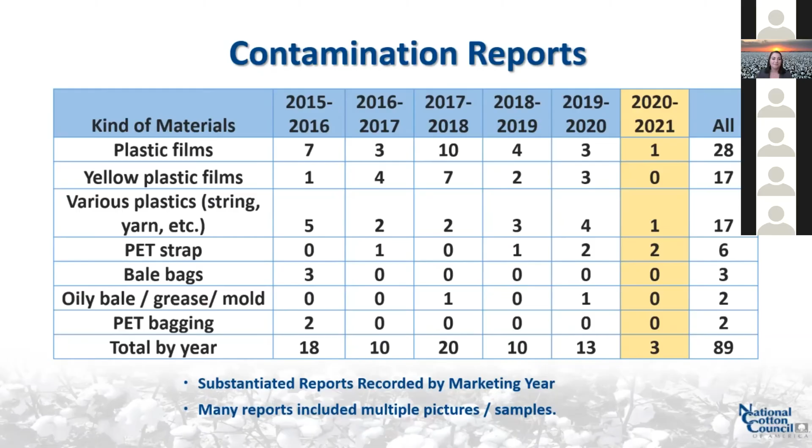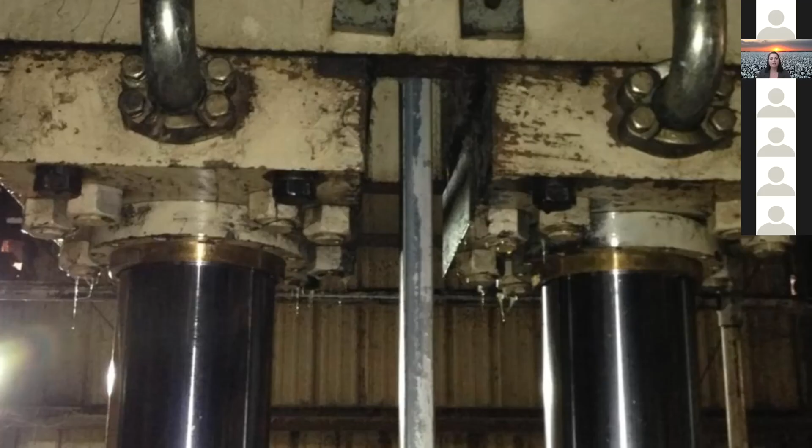Another thing we don't see in reporting, or haven't had cases of, but is still an easy thing to check on: making sure all your machinery is as clean as possible, that we're not getting any oil or grease inside of the bale press that could potentially get onto the bale. Just another easy thing to check around the gin to help combat this contamination issue.

Going into the round module wrap, we have been in the process of creating a new performance standard. I'll just give a very short background on what's going on, because John Wanjura will probably touch more on this since it's kind of his baby. TAMA produces two different types of wrap: their premium wrap, which is yellow or pink, and their value wrap, which is blue.

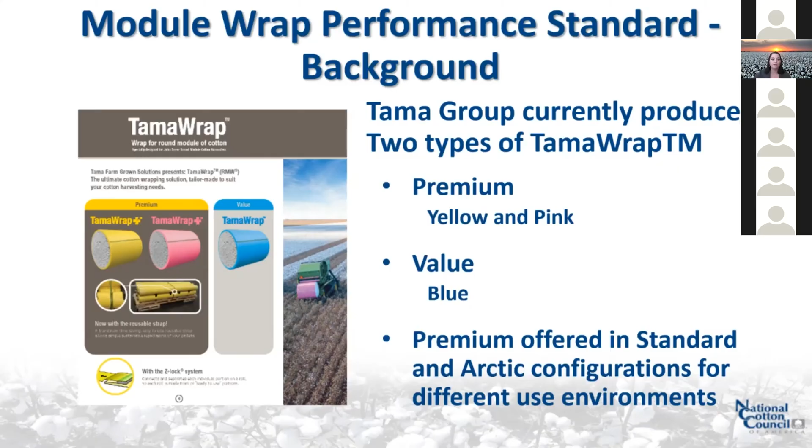This blue value TAMA wrap was developed as a lower cost alternative to the pink and yellow premium wraps. It can be more susceptible to damage due to less robust construction than the premium wraps, so we have to handle it more carefully due to the adhesive layer not being as robust.

On the premium, you have a full round layer of adhesive. On the blue, it's only a smaller strip of adhesive. Another issue is that in their specs, they claim these can be up to 100-inch diameter as a maximum for the blue wrap.

Whereas 92 inches is generally considered the maximum for the premium wraps. And as y'all may know, even with the yellow and pink at 92 inches maximum, you can still run into issues whenever these round modules are loaded onto module trucks, scrubbing the sidewalls and causing damage and pinch points, resulting in the wrap fraying, pulling, or ripping.

So that's something we have a cause for concern on. With a larger diameter, we're looking at even more chance of that happening. So be mindful of how large you create these modules, to make sure that if you're using a traditional module truck, we're not scrubbing the sides and causing unnecessary damage. These also have a higher chance of squatting in the field just because they run a little larger and have a little less robust shape to them.

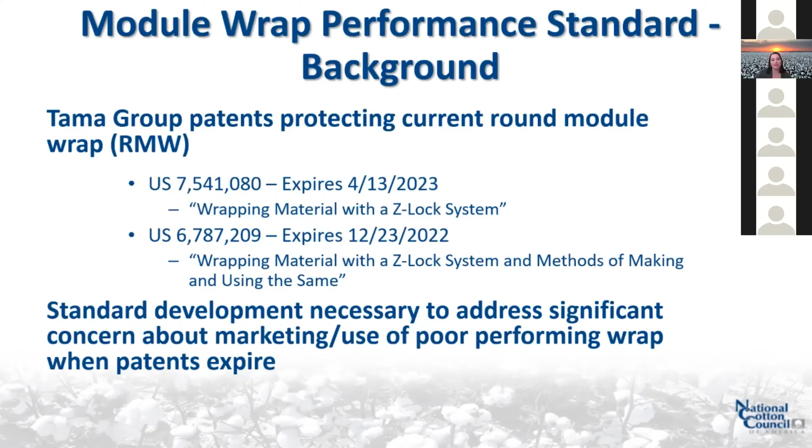We had a bit of an example of that this last few years with the PickSmart wrap, which obviously caused some major issues. TAMA is working with them legally because they came into the marketplace when they shouldn't have. But we saw some major issues with this wrap, and we want to make sure we address these quality concerns moving forward before those patents expire.

So a new standard is being developed to address the quality of round module wraps. We want to make sure that without a standard, wraps aren't more susceptible to damage. The standard will help the U.S. cotton industry promote the use of wrap material that's more robust and less likely to contaminate. We'll be looking at combined effects of multi-use layers, attributes such as adhesives that withstand both hot and cold environments, applied tension, length of module storage in various environments, and other factors such as color. I'll get into color a little bit later as well.

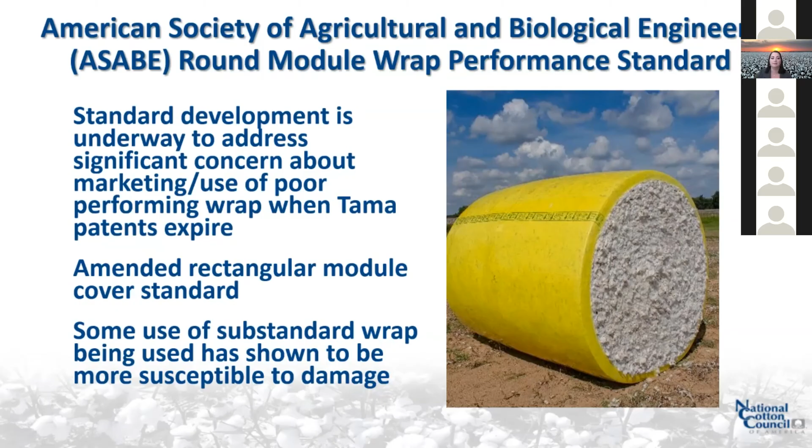John, who's coming next, will talk a little more about this, but I wanted to touch on it because it's so important. So why is prevention of plastic so important?

It comes down to loss of reputation and loss of market potential, as well as cost for the producer. And it's going to hit hard, especially this year. They just released the discount schedule, and plastic contamination for 71 or 72 is now in the negative 3,000s. So this is a big hit for anyone that gets a call with plastic.

We saw this coming from the beginning, but it's just reinforcing the fact that we need to pay very close attention to this and do everything we can to help prevent this plastic contamination before it becomes an issue.

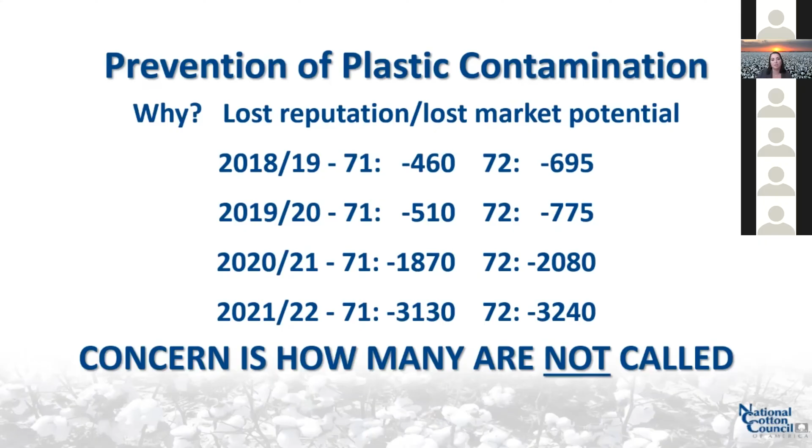But it just goes to show, if at all possible, walk your fields. Make sure that you get any debris or garbage or plastic out of that field before it's planted or before it's harvested, so that you can at least get that step ahead before it actually gets into the module and then has a chance to get into the gin and finally into the bale.

Some of our best management practices and continuing education - this is something we've added to over the last few years as we learn more. But the most important thing we found to prevent plastic contamination is making sure that these modules arrive to the gin undamaged. By doing that, it greatly reduces the chance of plastic contamination that gets into the bales.

So some management options we've seen gins and producers do is making a separate pile for your broken and damaged modules that come in and ginning those last. So you don't have any of that potential module wrap getting into the gin system and then running it back through with the good modules. Saving those for last keeps all the contamination potential at the end.

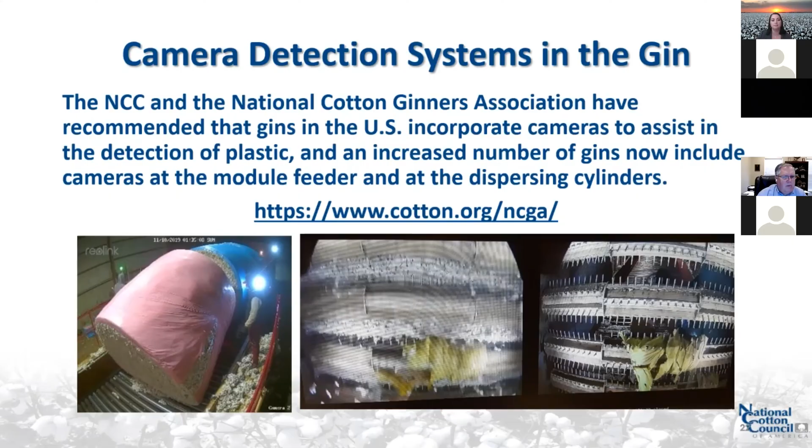Along with the cameras, we've also been updating and working on our education video, and this is available on both our website under the Contamination tab, as well as on our YouTube channel under the Contamination playlist. I hope all of y'all have seen this before - it's the 12 chaptered video, and it goes all the way from the field to opening these bales at the gin, and every step in between.

This would be a great resource for anyone doing staff workshops, grower seminars, or ginning seminars, in order to show their respective staff members each of these steps they may be responsible for. Each chapter ranges from about 3 to 5 minutes, so it's not very long, but it gives what to look out for, potential problems you may run into, as well as solutions to those issues and best management practices.

Just some updates on this. Since August 2020, when the video was last updated, we've had 739 views on the English version, and we do have a Spanish version available as well, which has had 18 views so far. If any gin, producer, or anyone wants a USB or flash drive copy, we can get those out to you - just reach out and we can get those sent.

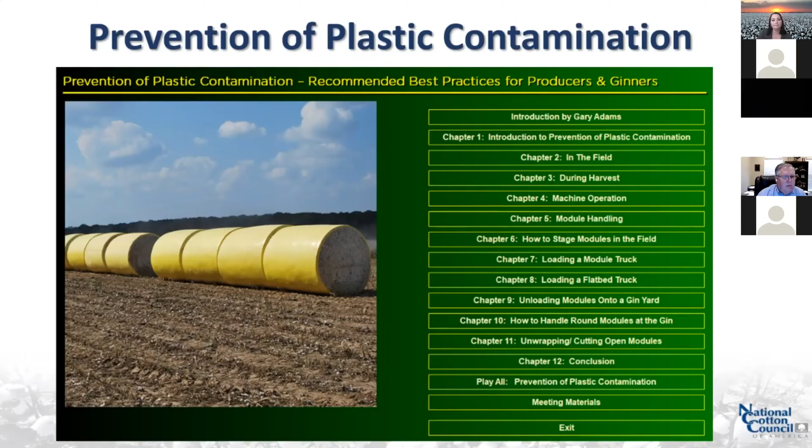That is a very important color. Our gin labs took a lot of time and research and development in order to distinguish this color as the best color for camera detection systems. This ranges from anything like the Viper to the detection systems you see in mills around the world. This blue color is completely separate off of the spectrum of cotton, so it really stands out very well.

The purpose and background of changing the woven polypropylene bag color was made for a good faith effort to mills overseas. We were getting complaints that these mills were cutting our woven polypropylene bag, and strands of the bagging material were actually getting into the cotton. We've not seen any evidence that that's true, and we've never really seen any evidence at all that our bale packaging is what is contaminating.

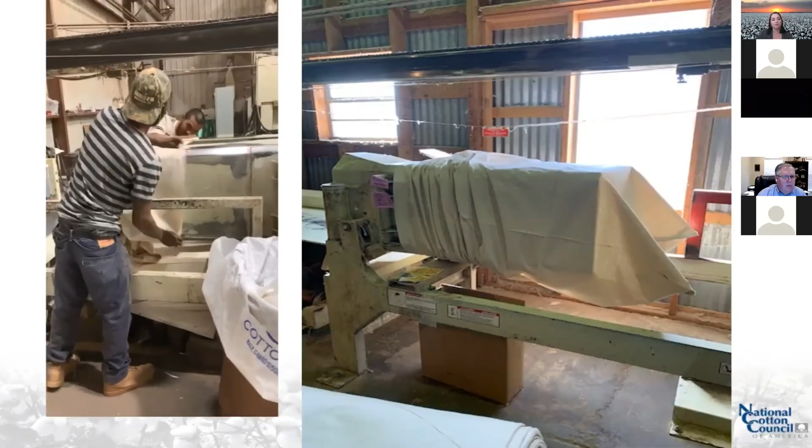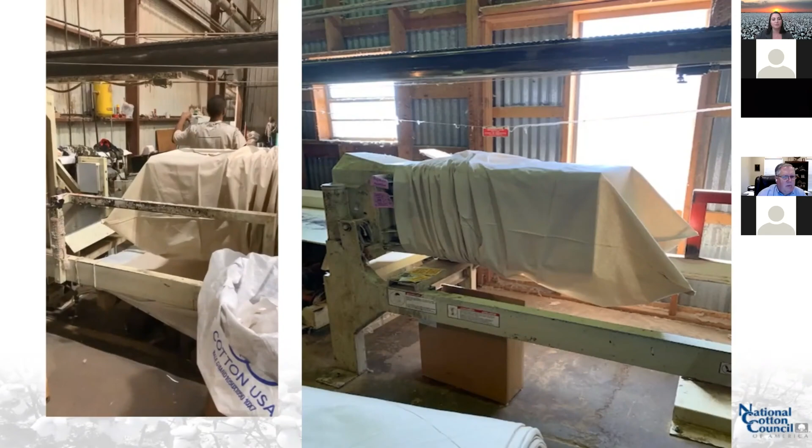I've got a couple of videos for you all. This is at the gin, and this gin previously used woven polypropylene bagging, but they actually preferred the cotton bag just because it was easier to get onto that manual chute than the woven polypropylene bag. It's just a little bit easier to handle. So that was a promising note.

It really just depends on how this test run goes. We hope to have some more reports back from international mills by the end of the fall on these bales, and again we're tracing them through the whole system. So we'll be in touch with more information as this progresses.

On a final note, we just want to make a point that it's critical that we reassure our customers and maintain our reputation. That really is the most important part in why we need to get rid of this plastic contamination, and why we spend so much time and effort on this issue.

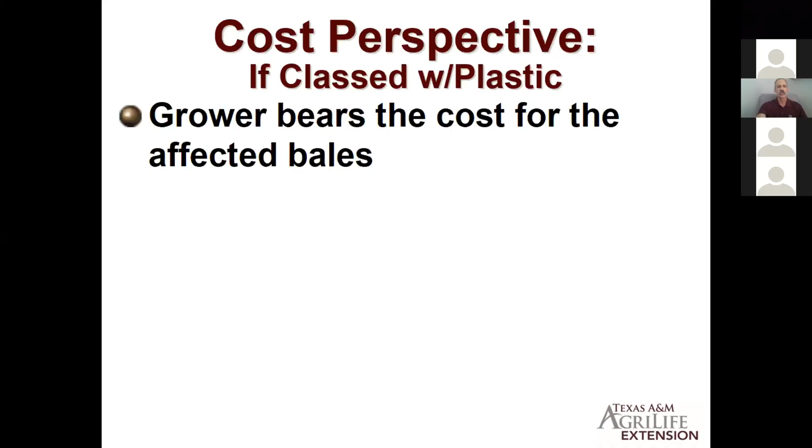So just a thought. We think about the cost to the growers. There are two ways to think about the cost impact of plastic contamination. Lauren mentioned this: if it shows up in the grading, then the grower bears the cost for those individual bales that are so graded. If you think about what happens to those bales in the market, you talk to a cotton merchant, they basically can't do much with those bales, so they really don't want them. That's what they'll tell you verbally, and that's what they'll tell you with their price.

If you had a forward contract to deliver bales to a merchant, there's probably some kind of buyer discretion clause that they don't have to take it if it has plastic, and many of them just won't. Or if they do buy it, they might buy it for 15 cents a pound or something like that. So when that gets translated by AMS in the spot quotes, AMS just reports that as a 40-cent discount associated with having plastic contamination. But it may be 100% — the merchant may just flat out won't take it. That's for actual market trading, buying at that price.

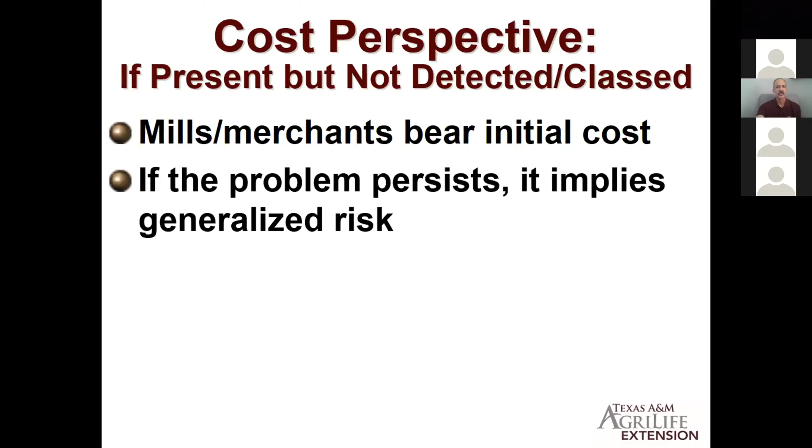Just think about it. What would a mill do if a certain region of the United States developed a reputation over a number of years of being a source of plastic contamination? Given a choice, they wouldn't buy bales from that region if they could help it. And if they did, the implication from common sense, economic theory, and past experience is that they'll bid lower for bales from those regions. They'll reduce their bids by the amount of their expected mitigation costs.

We have some evidence for this, some precedents, though not from plastic contamination specifically. There's very little data we can get our hands on as of yet, but we have experience with other forms of contamination that would have us worry about this sort of thing.

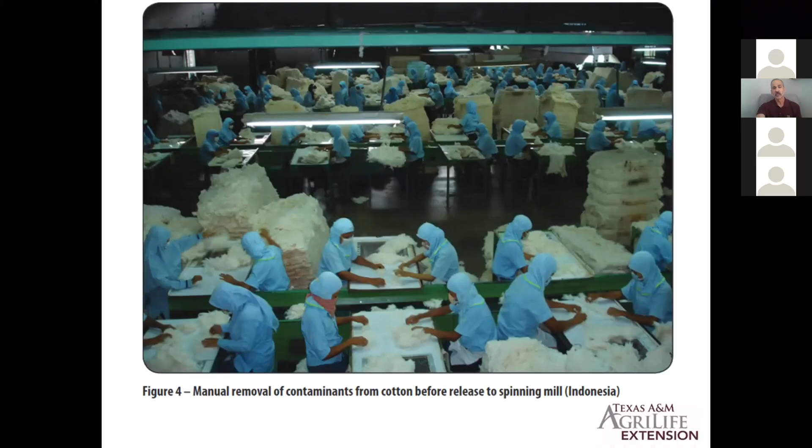This is a picture from Indonesia, 10 or 12 years ago. But this is the first thing a mill is going to do if they open up a bale and realize there's a whole bunch of contamination in it. They're going to have to go through all the bales from that particular purchase, from that particular source. This has been estimated to cost about 1 to 2 cents a pound. It just adds to the cost of that cotton.

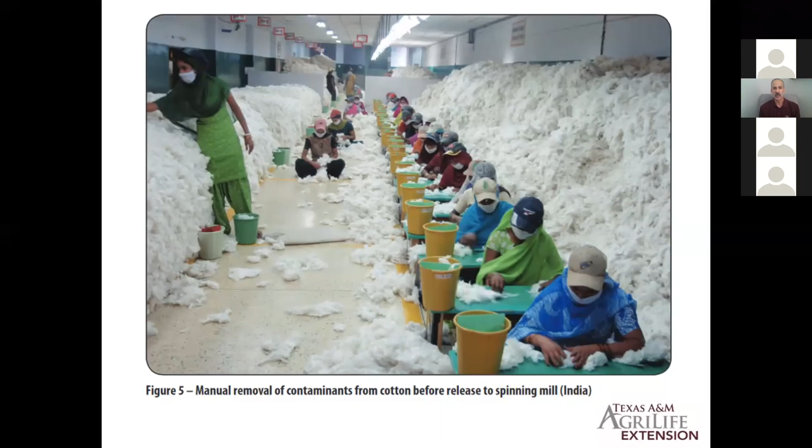Now, that may not seem like a lot to you, 1 to 2 cents a pound, but think about the mill's response. If they don't have any other reason to think it's risky to buy cotton from that region, they're going to try not to do it. But if they have to, they'll go through this exercise and discount their bids for cotton from those particular regions. And that's where the economics of this gets pretty ugly.

So I've got some numbers — I think I showed you these last year, looking at 2019. In 2019, 1% of the bales classed at the Corpus Christi classing office had plastic contamination. If 1% of them were docked 40 cents for being classed that way, that's the total loss right there. That's a big number that would bite the growers who produced those bales. But compare that to all of the bales.

I know this part is purely hypothetical — this is just a math example. But all the bales in that region, if they were docked 2 cents a pound because of a bad developed reputation, that adds up to a really big number. In this example, this would be for 2019.

But this kind of effect isn't just limited to the bales or the year it happens. You could have another 2-cent hickey the following year, in 2020, and it would add up to that. And maybe a third year, we might have more bales — hopefully we will — coming from the Corpus Christi classing office, which might add up to another big number here.

Now, how did I come up with this example? Again, I just told you it was a hypothetical example. And why is it multi-year, and why is it so big? We have examples from history with other types of contamination. The one that comes to mind most is the sticky cotton problem, because that was a well-studied problem back in the 80s and 90s.

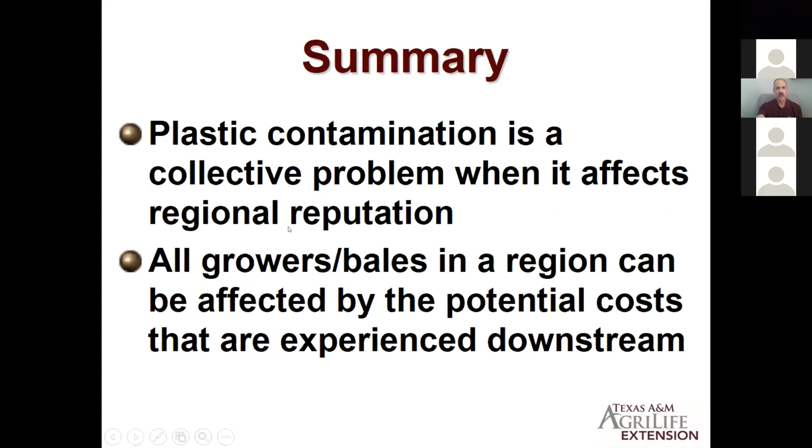So that's the end of my sermon. I'd be happy to answer anybody's questions if they have them. My contact information is there. Thank you, Jason.

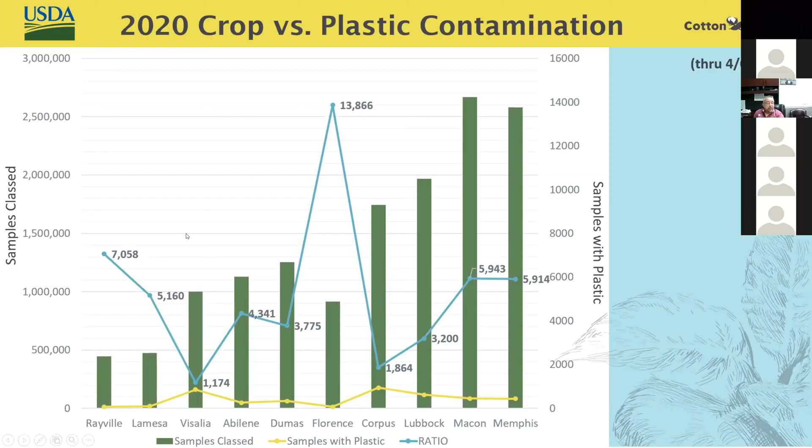One thing also to notice in this slide is that consistently the Corpus Christi classing office has fourth place in classing totals compared to all of the other offices, just slightly less than Lubbock, Macon, and Memphis classing office.

Well, good morning. As Bobby said, I go by Bobby too, but I've been working on this a while. Before I was at Texas A&M, I was at the Stoneville Gin Lab. Dr. Hardin, you're still in, you go to presentation mode? Yeah, let me work on that. Did that do it? Yes, sir. Okay, good to go. I had to switch my screen.

So I've been working on this a while, since not long after some of the first round module harvesters were introduced. We're going to talk a little bit about some of the research we've been doing at A&M in the last few years. We've got several projects. I think our previous speakers have really covered the importance of this, so I'm just going to jump right into what we've been working on.

I've had several students working on a module tracking project. We've also been looking at how we can detect plastic in the field with an unmanned aerial system, or UAV. Lauren had some great pictures showing some of the trash we might find in a field, in that case some of the discarded module wrap. Of course, along roadsides we also find a lot of plastic bags and things like that. One other area we've targeted for getting the plastic out is at the module feeder. And then we've done some more work just seeing how gin equipment is at removing plastic.

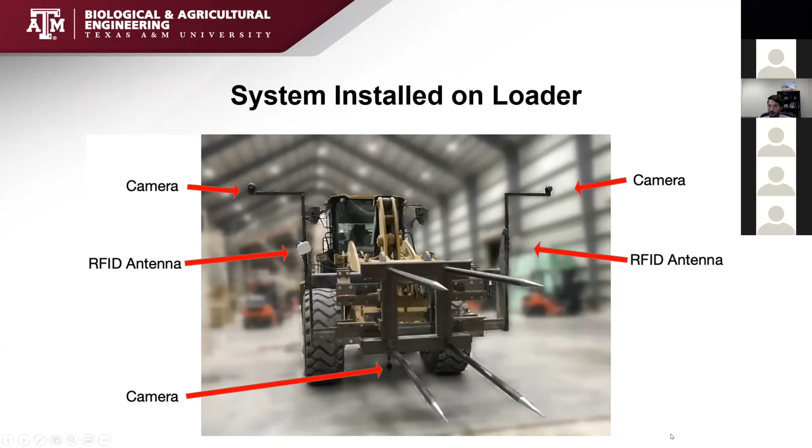So this is kind of the basic system. We put this on some loaders that were used with a spear to move round modules. Here we simply have some cameras mounted both high and on the side. There's one underneath that's a little harder to see, that really captures the bottom, which is where we do see a lot of the damage to the plastic wrap. And then we have our RFID antennas, which simply read that tag number on each module, so we have a unique identifier for that module. Of course, we're collecting all this data and saving it for analyzing later.

So this just shows you what we can tell. We can really tell where that loader's traveling. This is on a gin yard, though we also have some data where it was moving modules in the field. But most of our data right now is from gin yards, so we can see where we see a lot of action, where it's unloading trucks or where it's moving modules into lines on the gin yard. Part of what we wanted to do is really some logistics work: can we save the gins some cost by operating this more efficiently?

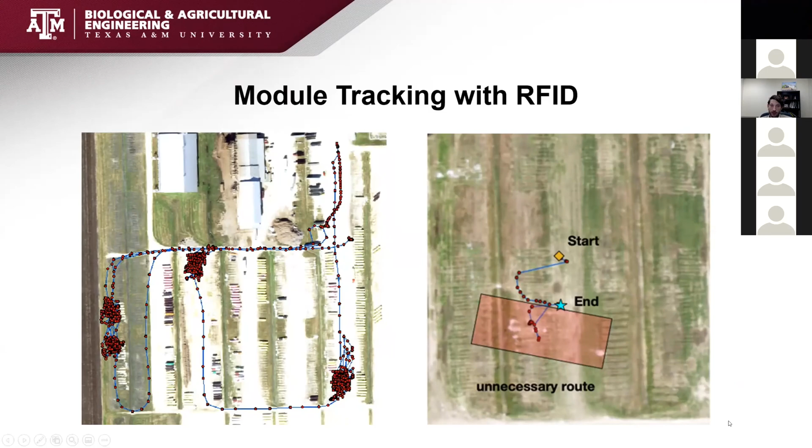So we noticed some other things in collecting these images as well.

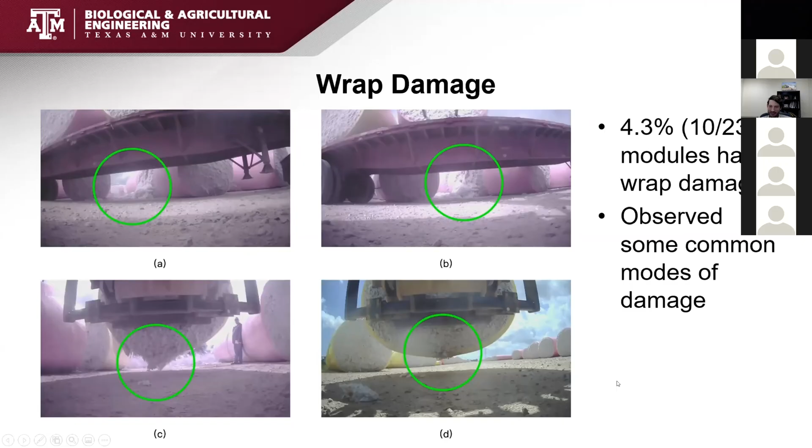Now this work, along with some studies that Dr. Wanjura has done at the Lubbock Gin Lab and another collaborator of ours, Jason Ward at NC State, this has really all been summarized in a report published by Cotton Incorporated. I'll share my slides, and this report's linked in there. Cotton Incorporated has put it up on their Cotton Cultivated website. It's just really some ways to prevent plastic contamination when handling these round modules. I'm going to cover some of the events we saw in the field and in the gin yard. I know Dr. Wanjura is going to go more in depth on some of the work he's been doing at the module feed.

So what we see here in this module are just some small holes on the bottom of the wrap. In almost all likelihood, this module was stored or staged on some cotton stalks in the field, and they've punctured the wrap. Again, the prevention here is we want to unload it at the end of the row and then stage them in a turn row or on the grassy borders of a field, not on the cotton stalks, because you will get punctures from those stalks.

Another one, this damage is a little more substantial here. Again, we're not exactly 100% certain of the cause, but a likely one from this - we saw evidence of this multiple times, and I know Dr. Ward saw it at other sites. When that module is moved through the field and not lifted above the cotton stalks, it can tear the bottom of the wrap.

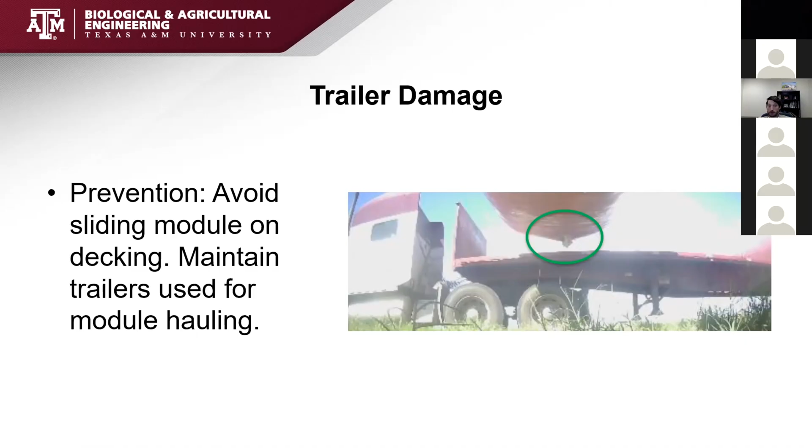We've noticed here, this module is being unloaded from a flatbed trailer, and we see a small tear there. That's likely from the decking on the trailer - if there's a nail or some rough spot, you slide the module and catch the plastic wrap and tear it. Again, this is an operator issue, but also a maintenance issue. Make sure your trailers that you're using for hauling modules are in good shape, and any worn components, whether it's wood decking or some metal places where there might be something that could catch, try to minimize that.

Again, this is a module that completely failed back there. And while this may not always be preventable, if we do see tears in wrap, we want to repair those immediately. Those tears can propagate, certainly as weather changes or you get some winds. If you have a tear, it can propagate, and when you have total wrap failure, then it becomes a real problem on the gin yard, or if it's in the field, even at that stage.

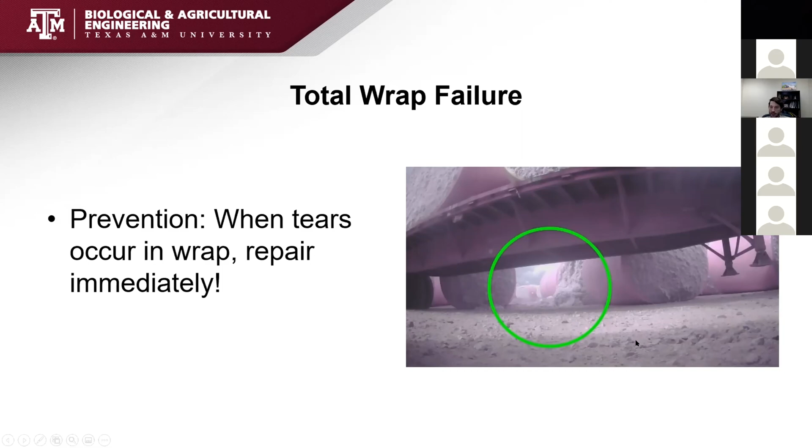Probably the major issue outside of module wrap when it comes to contamination is plastic mulch. This is a sporadic problem that only occurs where there's some fruit or vegetable crop grown on mulch, but when it happens, it's a serious problem. There will usually be a large number of bales contaminated, not only for the grower that had the plastic mulch, but that cotton gets into the gin and may affect other growers as well. So it's really not a good idea to rotate cotton with a fruit or vegetable crop grown on plastic mulch. You're asking for trouble there. You could make extensive efforts to get up all that mulch, but that's going to be some expense, and I think the cost of potential contamination is too great to justify that.

Harvester maintenance is kind of an issue as we start to put more hours on these machines. There were some issues in Australia where worn components started tearing some of the wrap as it was applied to the module. We also see, with the candy cane modules as some people call them, the wrap actually wrapped inside the module - that's really a failure of the wrap clutch on the harvester. So we want to make sure it's operating properly to avoid that. And then for module truck chains, make sure you have the right lugs on the chains, and that the speed of the chain is matched to the ground speed.

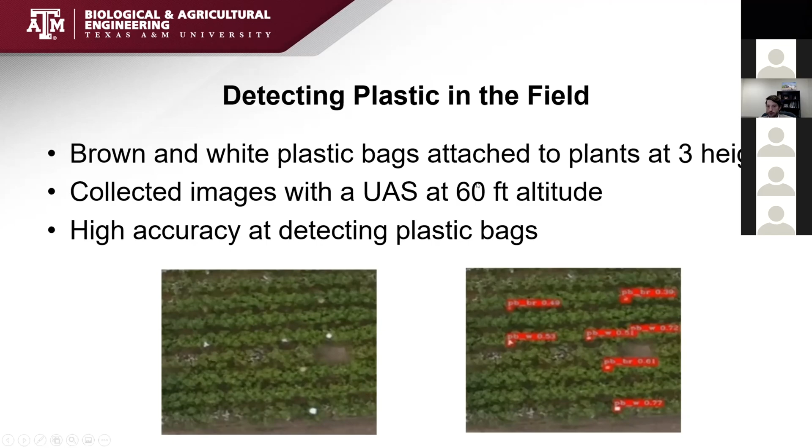So that's a difference in this study. We measured the amount of plastic that's removed by each machine and that ends up in the lint. We're still analyzing the data - we've sent the lint off to Cotton Incorporated, to their textile mill, to find what they can there.

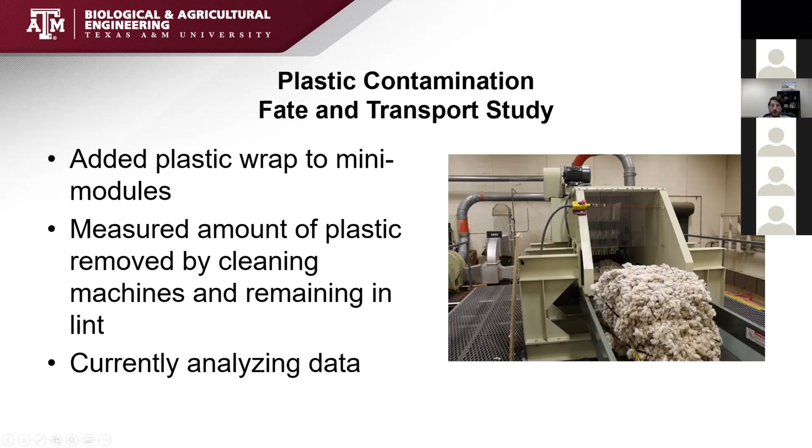Basically, we see small pieces - and this is all with module wrap - either single, double, or triple layered, as it's wrapped together you may get where one, two, or three layers are stuck together. We see that both the smaller pieces and the larger pieces aren't removed as well, except for the ones with multiple layers stuck together that are thicker. This is really the same conclusion we came to at Stoneville, and that's generally a good thing for module wrap - it is a thicker plastic. We see there's a better chance it gets removed than things like plastic bags or the ag mulch. Plastic bags tend to be about a half mil thickness, ag mulch is commonly about one mil, and a single layer of module wrap is three mils. So we see much better removal with that, but we're still not getting all of it, and any plastic left in is a problem.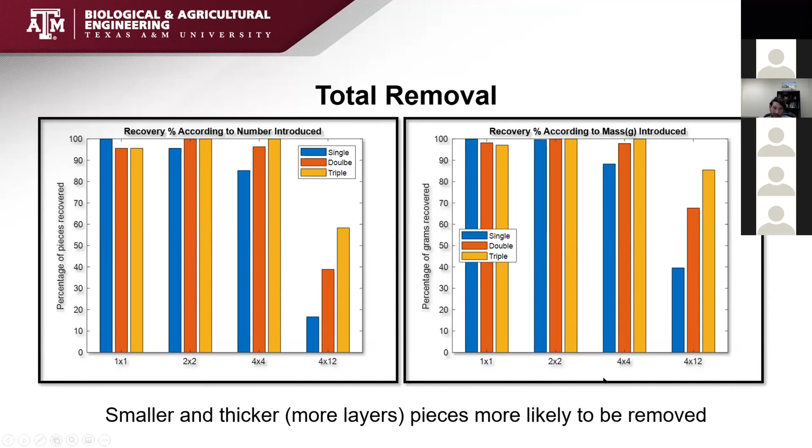There was also a study done, some of this work started by Dr. Alex Thomason before he left for Mississippi State, and we're finishing it up. There's also a study, supported by the Cotton Foundation with Deere and Tama, looking at plastic in bales from a contamination test at a commercial gin. That's still being analyzed as well.

As I mentioned, the mechanism for introducing this into a gin - some of the long pieces, particularly if the module is cut at the wrong location, the module wrap, those long pieces wrap around the dispersing cylinders on the module feeder. Smaller pieces break off and enter the cotton. Most gins will typically shut down periodically and manually remove this, which is time consuming, so they can only do it maybe every shift or so. It's also potentially a safety issue.

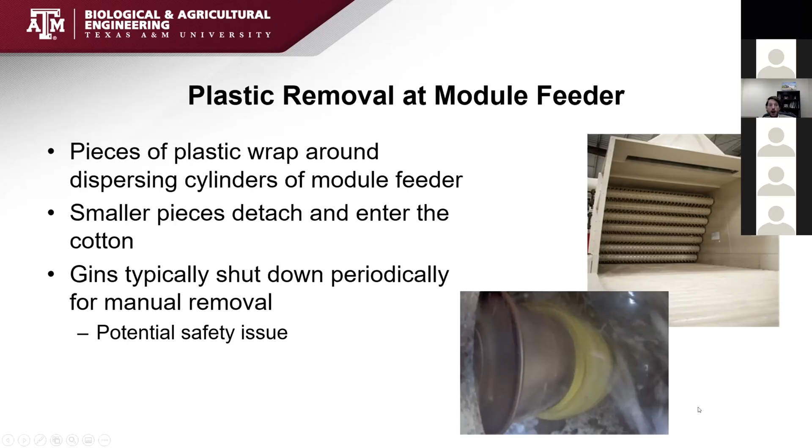While gins typically follow proper procedures and shut down and lock out equipment, you'd still rather not have people in that location, and you'd rather not have to shut down your production to remove this. So we've been looking at an automated system to remove it.

We're installing this on our module feeder that we have in our microgin. It's not shown here, it's kind of removed for visibility, but it has a stainless steel brush cylinder, and it moves up and down a set of rails with lead screws.

We've integrated this with the USDA ARS plastic detection algorithm that Dr. Pelletier at the Lubbock Gin Lab developed. So when we detect plastic, we can automatically run it. It'll move this brush to the right cylinder, turn and remove it, and then it lifts up out of the module feeder when it's done operating.

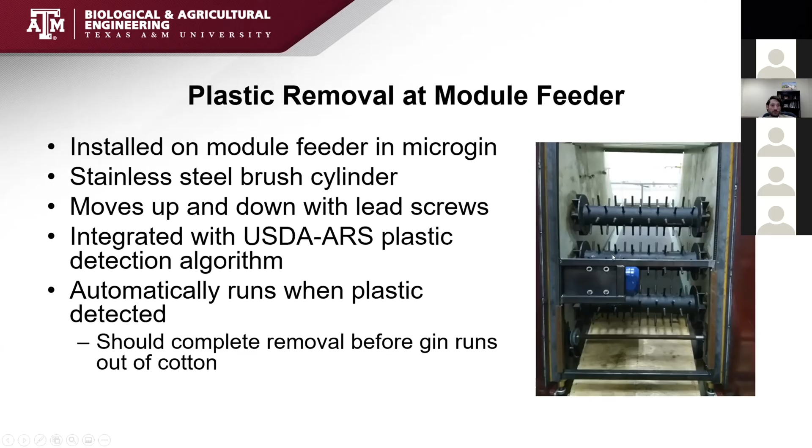The idea too is that we can do this before the gin runs out of cotton. Under the module feeder, we typically have a steady flow feed control, which accumulates cotton - we might have 30 seconds to a minute's worth of cotton to feed into the gin, even while we're not feeding a module in. So that's good for the gin's bottom line to maintain production, if we can do this while they only have to stop feeding cotton into the gin for a short time.

We need to test our plastic removal system - we've largely got that assembled and ready to go, and we'll be testing that soon. One thing we're looking at doing this season and probably the next is evaluating some of the wrap removal systems in gins. Most people in the ginning industry are familiar with some of the shortcomings of these systems, but we really want to look at this from an engineering perspective and identify potential improvements we can make to avoid contamination.

Some longer term things: one technician working on this is going to start graduate school, and he has a material science background, so we may be looking at ways to develop new separation methods for cotton and plastic. I saw the question earlier about looking at the bale bagging and getting away from the plastic in cotton bale bags, and of course that question comes up with the modules too - can we get away from the plastic?

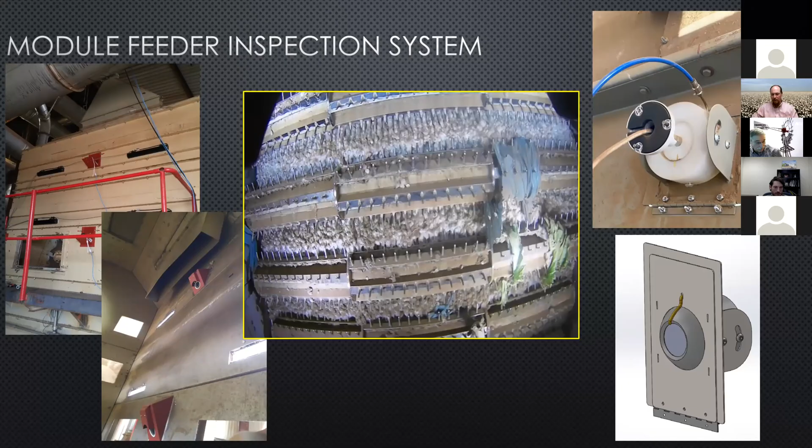The next layer of complexity, tested last year and the year before, was an improved software system that works with this module feeder inspection system, interfacing with the PLC that controls the module feeder to effectively pause the bed of the module feeder on a preset time interval.

There are different ways of doing this, but basically the system has a programmed pause, say every 15 minutes, pausing the system for about 10 seconds, give or take, to allow the cotton to fall away and expose a clear view of the backside of the cylinders, so the gin crew can see and know if plastic has accumulated.

The other feature written into the code was a machine vision algorithm that could auto-detect when plastic was built up or accumulated on those cylinders. We're doing more work to flesh that out and develop it further, but that is included as part of the system.

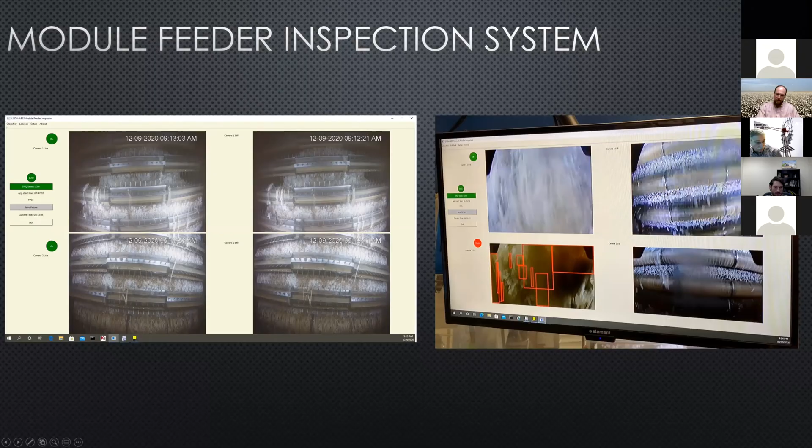The final system we worked with over the last couple of years was part of a project with John Deere and Tama, looking at module unwrapping and handling systems, or techniques that tend to leave plastic in the modules as they're fed into the ginning system.

So we installed not only the module feeder inspection system on the backside of the dispersing cabinet, but also additional cameras on the front end, or unloading end, of the module feeder, along with some RFID antennas, so we could track and record the unloading and unwrapping process for these modules and see what may have caused plastic to remain in the cotton as it was fed into the gin.

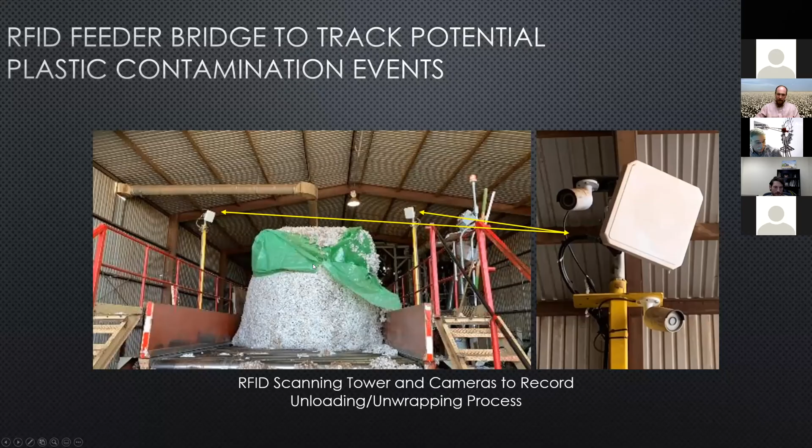The way this system works, as I mentioned, we'd see a progression of images showing how it works in reality. Basically, some event happens during the unloading process — either the module isn't placed on the feeder properly, or something goes awry in the cutting or unwrapping process — resulting in a piece of plastic remaining with the cotton that eventually winds up on the dispersing cylinders, captured by that module feeder inspection system.

This helped highlight techniques gins need to pay attention to, and showed ways to improve handling, especially of small diameter modules. Those smaller modules, if you're flipping them off the truck for example, often lack the correct geometry to stay upright on the flat end, so they tend to fall forward or backward, often trapping plastic underneath the cotton as it's fed into the gin.

Even though those are small diameter modules, they're still much too large for humans to get on the feeder bed and pick them up or move them around effectively to get all the plastic out. So it's changed the way some gins handle those modules — they've gone to more of a wagon wheel orientation for handling small diameter modules, so if plastic does get trapped, they can roll the module forward or backward as needed to remove it more easily.

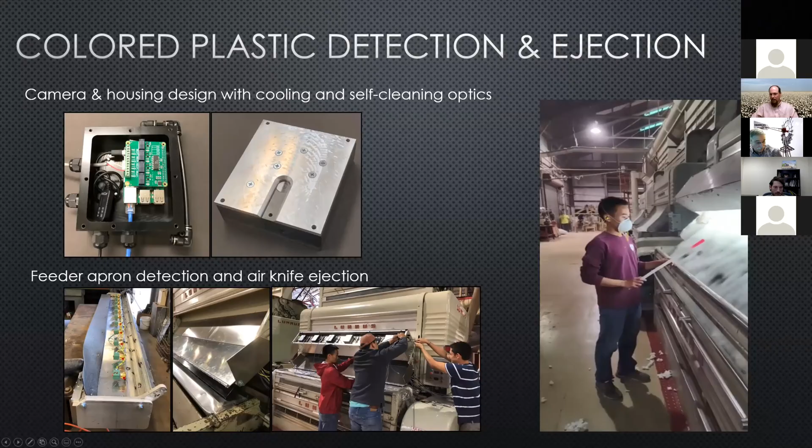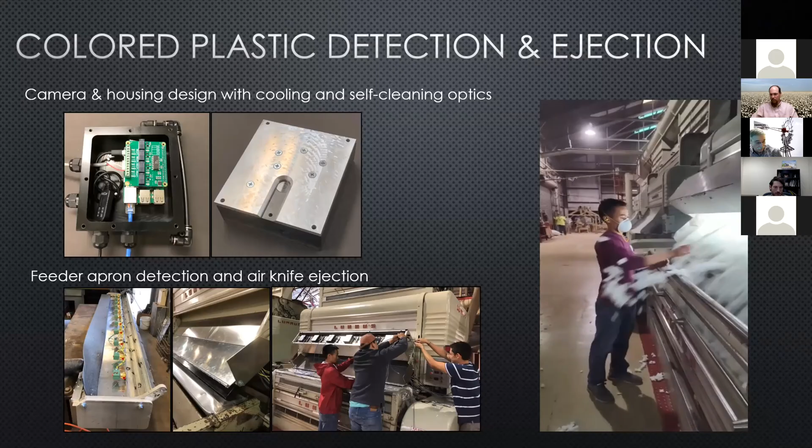You can see our technician doing quality control checking of the system, making sure the cameras are on and detecting the changing color in the cotton flow, then actually firing those solenoids to blow the perceived contaminant out of the system.

Now, this technology has some challenges. As mentioned, it's based on color digital imagers, which tend to mimic the human eye and our ability to perceive differences in colors. So we're trying to look for the color difference between the plastic and what we'd consider normal cotton colors. The challenge is that most of the available colors used on module wrap materials overlap the common cotton color space.

That's been a challenge in designing the system to be tuned to look for the plastic, but not have false positives if you get cotton or colors in the cotton, such as from burrs or sticks, that may overlap more with the pink module wrap colors we see.

Another issue we tend to have here on the high plains is yellow staining or yellow tinging in the cotton from environmental effects during storage or even during pre-harvest. If we have yellowing of that cotton, it tends to overlap very well with the yellow module wrap color, so we can see an increase in false positives with the system that way.

This system was commercialized under the name Viper, and Ross Rutherford, I believe, is going to discuss a lot more about that in his presentation. But these are images from the two installations we've had of this technology so far.

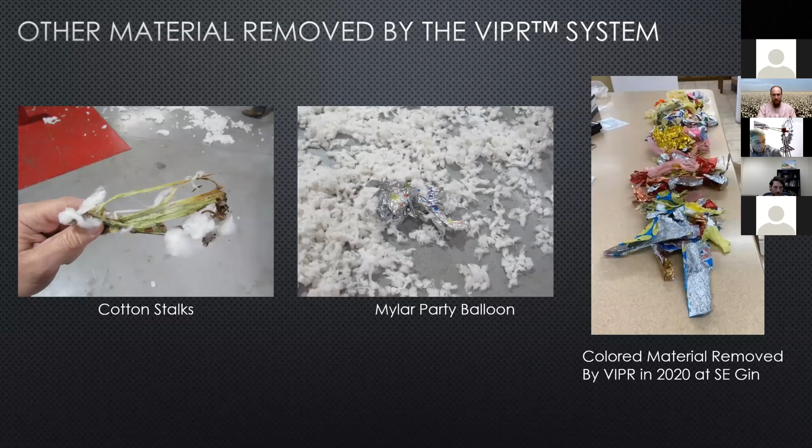We took this technology last year to a different level. There were still some questions raised as to whether the problem is really that big — 'I'm not seeing a huge number of calls coming out of the AMS classing offices, so I don't think I have that big a problem.' We wanted to help address that issue by providing low-cost solutions to answer the question: what is the magnitude of the problem I have? Is it really nothing, or do I have something I need to address?

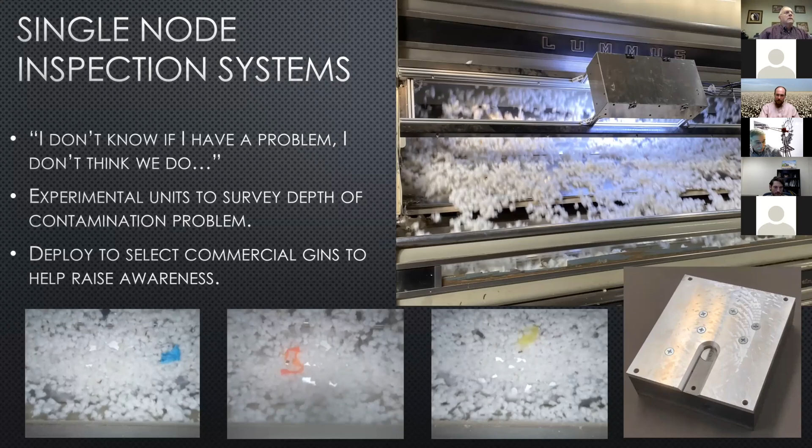So we took a couple of these single node camera systems, without the ejection technology, and installed them over some gin stands in a couple of gins here in the high plains of Texas to help show some of the plastic occurrences. Now, it's not all module wrap — they're still processing a good number of conventional modules, so we see all kinds of trash and contaminants coming down the feeder apron. But these systems were very effective in capturing that and giving good insight to the ginners and gin managers as to what level of problem they may have.

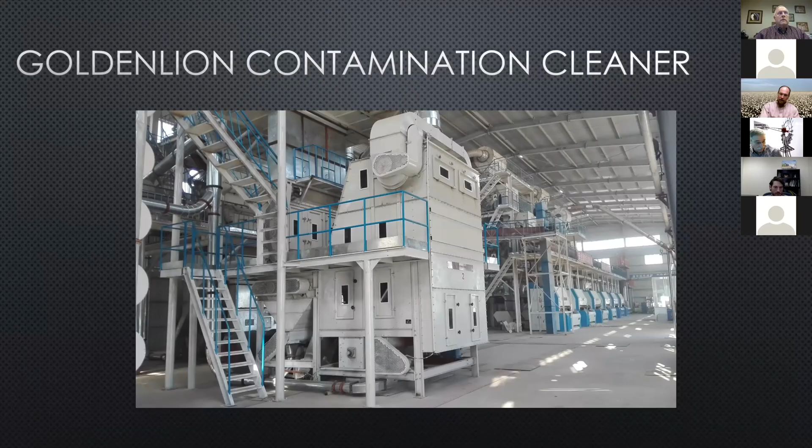Now, moving on to the contamination cleaner. This is the GoldenLion contamination cleaner. It's built by a company in China, and Cotton Incorporated funded a project where they were able to purchase one of these machines and bring it over to the Las Cruces ginning laboratory and install it there. This system, as advertised, is able to remove a lot of material from seed cotton.

One of the things they claim they can remove is special soft trash. I'm not exactly sure what that is, and I don't know that it's been completely defined yet, but they claimed this residue film has greater than 80% efficiency at removing that. That was one of the attractive things about this off-the-shelf solution, to really see, is it that good?

Through the testing they've done so far, that number is really closer to 60% when you're looking at module wrap type plastics.

The way this system works is there's a series of spiked rollers, opening beater type cylinders that open the cotton up, sends it through a horizontal type cleaner to open the cotton up more, and then provides that loose open material, both cotton and plastic, into an air plenum chamber where the plastic and cotton are blown up towards a covered condenser drum, where the idea is that the plastic sticks to the screen drum and is carried around to a doffing brush and thrown out as trash, while the cotton, heavy enough with the seed still intact, falls down and is taken out as clean cotton.

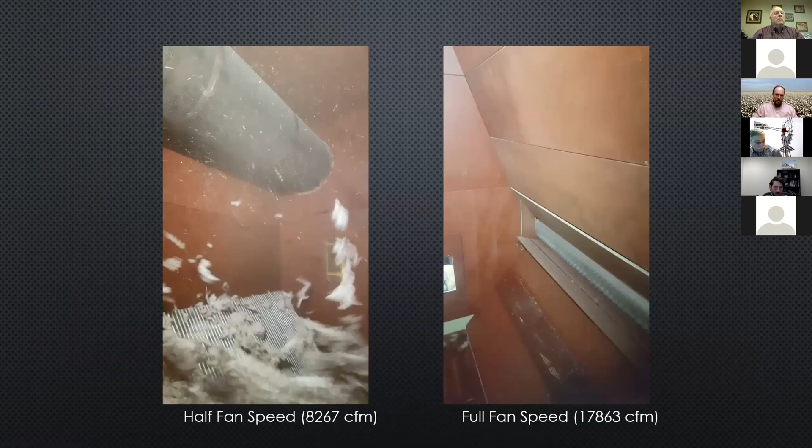So they ran into some issues after installation, looking at the performance of this machine. The fan speed that the manufacturer specified was not high enough to really get anything to stick to that covered condenser drum.

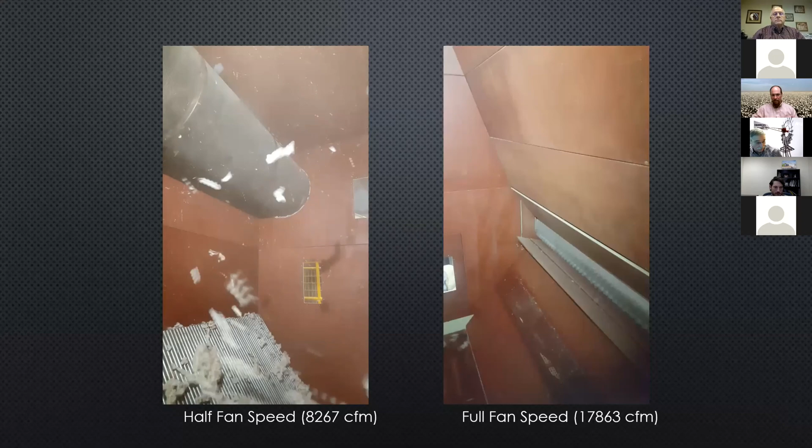This video that's playing now is the system operating at the specified fan speed that came from the manufacturer. And you can see there's not a whole lot of anything really sticking to that drum as it was intended to.

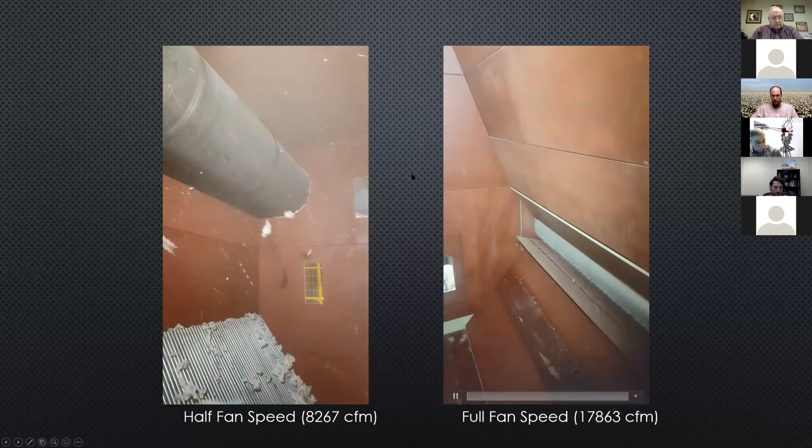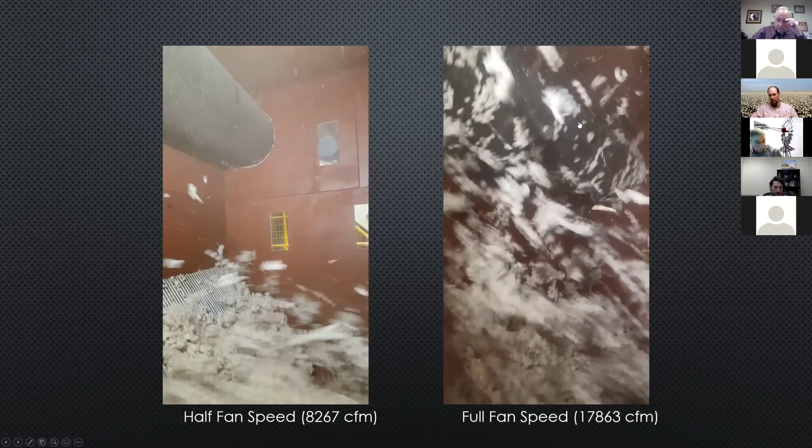Now, they made a change to the fan speed and basically doubled it, and got a lot more material to stick to that drum. You can see plastic pieces and cotton sticking to it, and the system is working a lot more effectively with a higher fan speed.

That was one of the improvements they were able to point out and make there at the Las Cruces lab. They did some testing looking at specific colors and types of plastic that was spiked into the seed cotton and looked at the performance of that machine for those different types.

The lighter weight round module wrap and shopping bags were captured within the range of the manufacturer's claim. That was one of the positive points there.

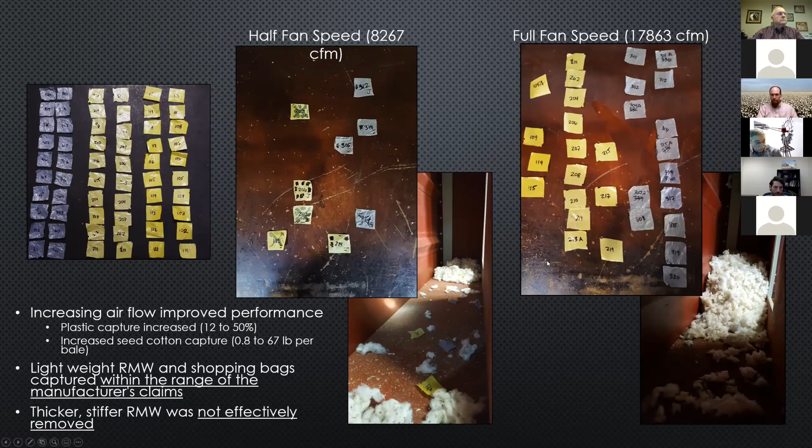Some of the other issues they're facing now trying to address is this issue of the plastic stripping off of that drum because of the airflow coming around it. You see early on there was a yellow piece that stripped off, and then there was just a blue piece that was stripped off. So they're looking at design changes to help address that problem.

Another very unique thing they're looking at at the Las Cruces lab is this concept of using a thermal removal system in a passive manner to remove plastic from seed cotton. They did some testing and found that plastic will melt and stick to a metal plate at about 100 degrees Celsius, or around 200 degrees Fahrenheit. At those temperatures, cotton is not harmed — that's well below the critical temperature for cotton where it will combust, so it's a fairly safe thing.

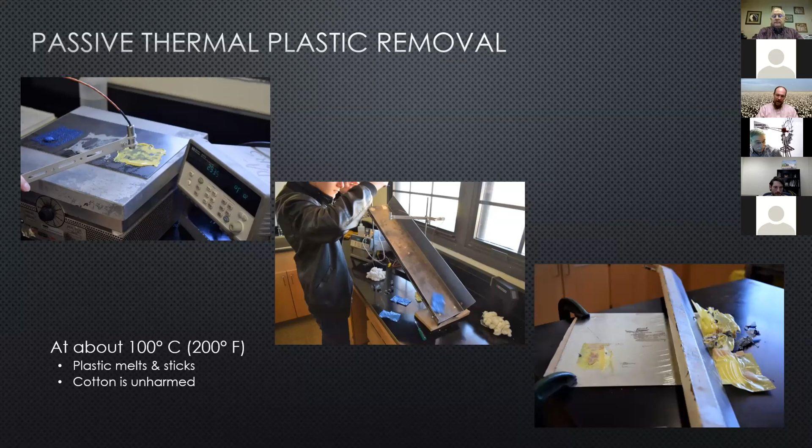From that, they were able to design this concept where cotton that contains plastic could be fed over a set of heated metal rollers that would have the plastic stick to the rollers, and then the rollers would rotate around while the cotton continues to fall and flow on through.

The plastic would rotate around on the rollers back to a fixed stationary knife and be scraped off and removed later on. There's some additional testing they're working on there with this system, but it's showing some promise. That's a new unique passive system that doesn't rely necessarily on high-tech detection and removal systems, just using first principles to remove that material from the flow of cotton.

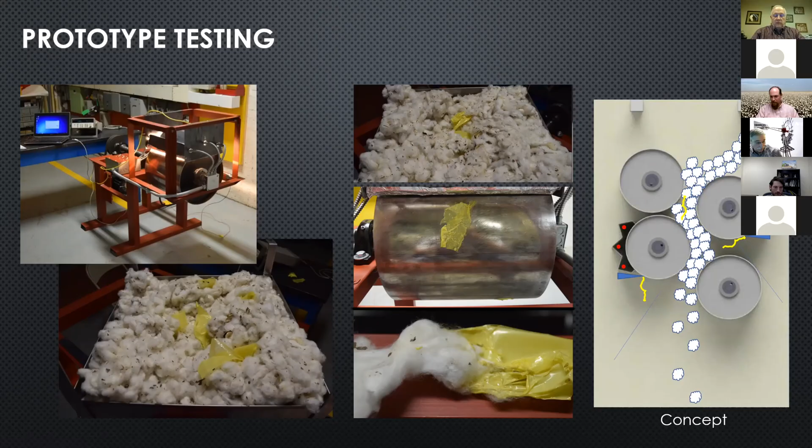Now, going on to the module wrap performance standard, Lauren mentioned some of the background with this standard, so I apologize if I rehash some of those, but just to cover it, TAMA is currently the only sanctioned producer of wrap. They have two product offerings, the premium wrap, which is the yellow and pink wrap, in addition to the blue value wrap. All of those materials are offered in a standard and an Arctic configuration for different use environments.

The way that wrap works on the module is shown here in this diagram. This is for the premium wrap, where you have two different materials. You have an opaque interlayer material that has no tacky adhesive on it, so you have about a wrap and a half, give or take, almost two wraps of that non-tacky interlayer material on the cotton itself.

Outside that, you have a couple layers of tacky layer material that's a translucent color, with tacky adhesive that helps that material bond to itself and hold the shape of the module, keeping that wrap material stuck down to the outside of the module, in addition to the wrap tail adhesive, which is a stronger adhesive that holds the tail down to the most outer layer of the plastic.

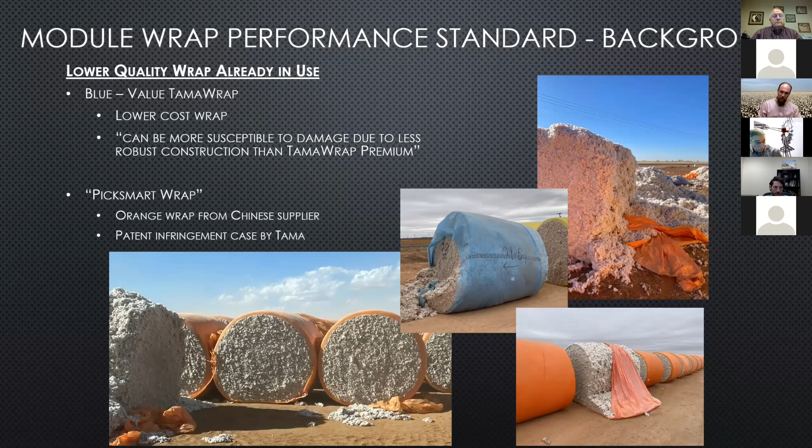So our objective is basically to develop a standard that specifies the minimum material strength and performance levels for that new wrap coming onto the market. There is an existing ASABE standard for cotton module cover material performance, and we're using that as our basis to develop this standard, modifying it to include language and specifications for this new round module wrap. That's a lot simpler than going through new standard development, and we hope to have something finished and available by the beginning of this ginning season.

So to talk about the way that the standard concept is moving forward, there's a couple different testing aspects going into this. The current working document already has the standard scope and use statements that are kind of boilerplate information in the standard.

There's a laboratory testing requirement being specified in the standard for these five tests, based on ASTM testing methods so they can be done under tightly controlled laboratory conditions. We've got specifications showing manufacturers how to take samples of the new unused wrap material for these specific tests so they can submit that material for compliance testing.

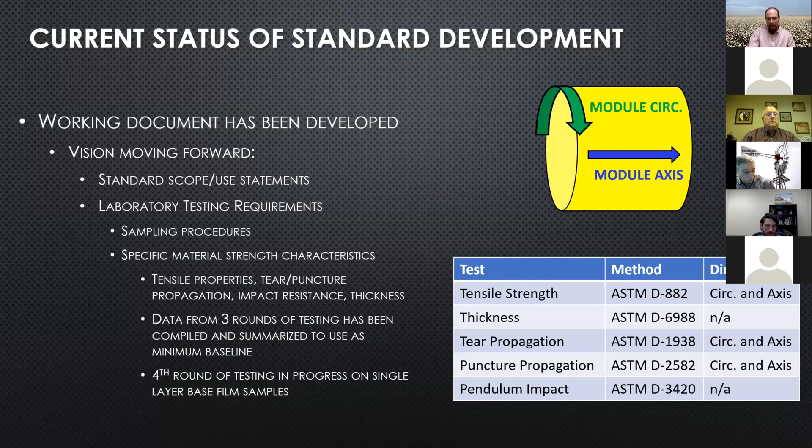We've done several rounds of testing, and we're actually in the 4th round of testing to gather the data that will be used in this standard right now. Once that information is available and back, we'll summarize that and hopefully get the draft standard moved on through the balloting process soon.

There's also a field testing requirement that is put in place to address the performance of the wrap system. We can test the base material and look for any glaring errors or problems that may exist in the parent material used in that plastic. That will help us identify some fairly simple, straightforward things that may be indicators of poor performance.

But really what we want to get to with this standard is some assurance that the material coming onto the market is going to perform in the field. If it doesn't work on the harvester, if it doesn't feed right into the module forming chamber, if it doesn't stay on the module and protect the cotton and keep that cylindrical form over an extended period of time in the storage environment, then it won't meet certification with this standard.

So we're putting in testing procedures and specification levels for the storage duration it has to be evaluated under, what use environment it's going to be evaluated in, whether it's to be used in a hot or moderate environment or more of a moderate and cold environment.

How does it perform under UV exposure? Does that adhesive break down, or does it remain intact? And then you've got the natural repeated exposure to rain, wind, snow, and all the other environmental effects.

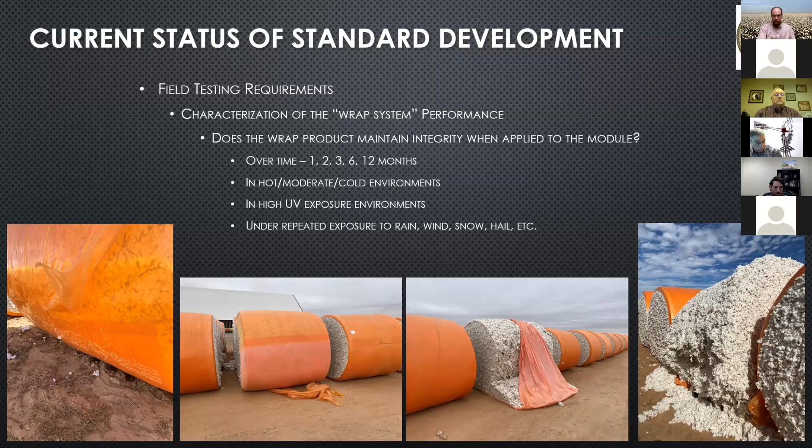The other thing we're trying to include in this standard is a specification of color. We have an approach right now that would have two levels of specification for potential wrap materials coming onto the market. The first is an acceptable level that says don't use obviously noxious colors such as clear plastic, white plastic, or brown plastics—those that are very difficult for color camera-based, digital color camera-based systems to detect.

Okay, and so if you do that and you meet the performance requirements from the laboratory and the field, you're at the acceptable level for the standard.

Now, moving forward, there's a higher level of certification in the standard that would have a more specific color specification. One concept moving forward is to use this CIE LCH color model concept. That's a fancy term for a color space defined as a color sphere. You specify three parameters: lightness, chroma or saturation, and hue of the color. And then also put in this delta E, which is basically an allowable margin around that single point.

You specify on that color sphere. Now, Lauren mentioned there was some color difference that occurred in the bale wrap material they saw this last year with this Pantone 306C color. That gets to this concept of using a delta E value, which allows manufacturers to be off of that mark by a certain amount. By specifying that delta E value, you can tighten up how close you want those manufacturers to be to that specification.

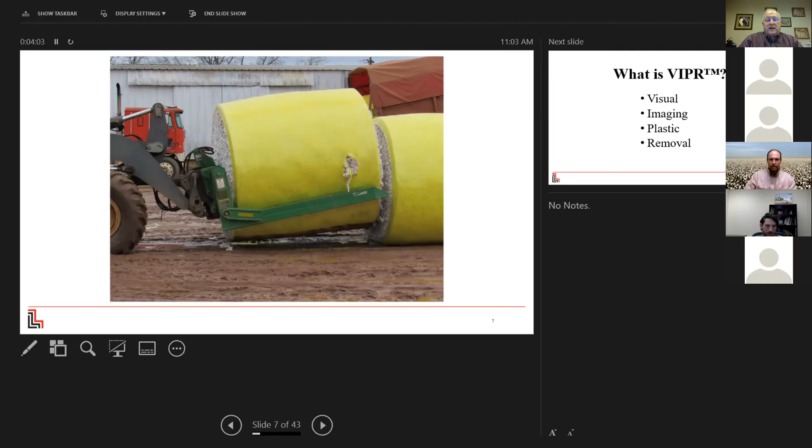And of course, we see damaged wrap, the typical handling systems, how the wrap is cut when it's unloaded, and other things. And of course, we're talking about module wrap. I remind you, that is not the only contamination. As long as there are Walmart bags and wind in West Texas, there will be contamination in cotton fields, and shopping bags and other types of things get into the fields.

But the crux of what I'm going to talk about is, what is VIPR? I give Greg Holt of the USDA Gin Lab in Lubbock credit for naming this visual imaging plastic removal, and that's what we call the trade name of this commercial unit.

To give you a little background, the USDA ARS proposed research, and Cotton Incorporated funded it, on sorting contamination. The USDA ARS Gin Lab in Lubbock worked with a company in Indiana called Bratney Companies that does a lot of sortation in the nut industries and soybeans and different types of things to optically detect outlier type colors to eliminate contamination. So they started working on a system to mount on the feeder apron of the extractor feeder, mounted above the gin stand itself.

Their prototype version was put on at Meadow Co-op outside of Lubbock, just south of Lubbock. Then in 2019, Bratney wanted to take this commercial, so they partnered with Lummus to develop a system to mount and to market to a customer or customers.

And the first customer that we sold this to was Southeastern Gin and Peanut, Kent Fountain's Gin. Kent is currently the chairman of the National Cotton Council. We did that and did first testing. The first results in 2019 were presented at the 2020 Beltwide Conference. Then in January, February, we went back to Southeastern and did some more testing.

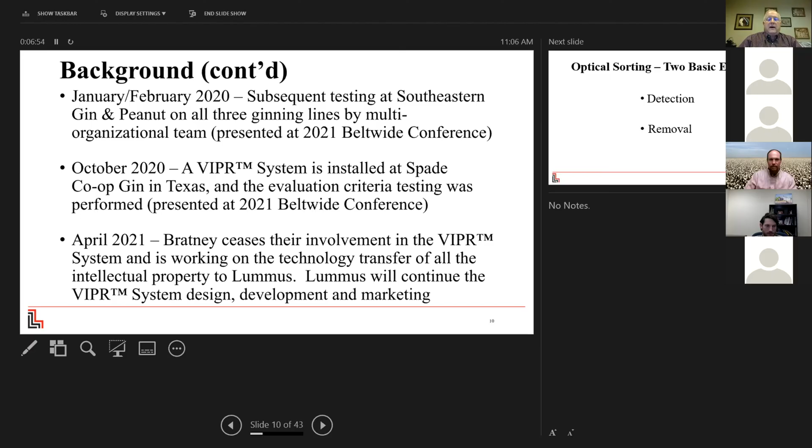So the Viper is not going away. Lummus is going to continue, and we're going to obviously try to refine the design, take as much cost as we can out of it. It's not an inexpensive technology, but as you'll see, it is effective. Of course, when you do optical sorting, you do either detection or removal, the two basic approaches. It's similar to what John Wanjura talked about with the independent systems they put on last year at some gins, just to determine if there's a problem.

It's kind of like the commercial where the guy's robbing the bank and the people say, do something. And he says, oh, I'm just a security monitor, not a security guard.

Those systems detected and determined, yes, there is contamination coming down the feeder apron, even in gins that don't think they have a problem.

That being the case, the second step is removal. If you detect it, what can you do to mitigate that contamination? The feeder apron is one of the best places to do it, albeit not perfect, because it does create a certain amount of mess.

It is an effective location to do it, although we all know the best way to stop contamination in a cotton gin is to never let it get into the gin itself, because even at the module feeder, it starts to tear the pieces into smaller pieces. You can't get it all. It causes downtime and other adverse reactions.

When you go to detect it, we use RGB cameras. There are other systems, but black and white cameras, near infrared and InGaAs vision, hyperspectral, all that technical jargon. We use the RGB cameras.

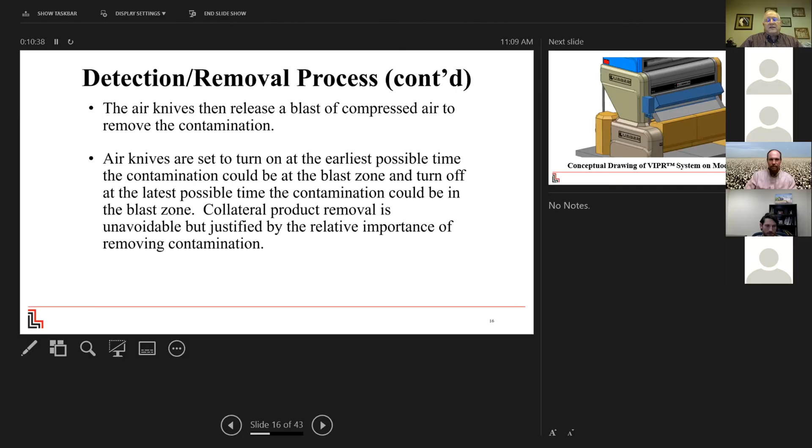A saw gin does two things very well. It removes the fiber from the seed, which is what Eli Whitney had in mind. And it also grinds big trash into small trash, because you've got 12 or 16 inch saws turning at 800 RPM. So it chops up big things into small things, and you don't want that contamination to get into that saw gin.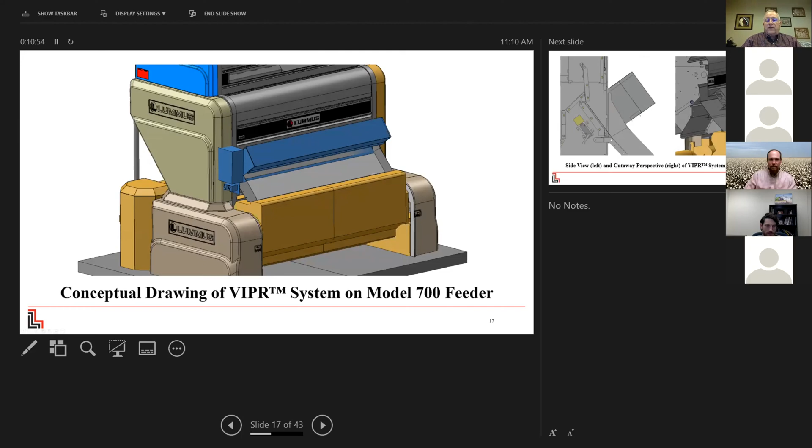Here's a conceptual drawing. You can see the Viper mounted over the feeder apron. This cabinet holds the cameras with the control box. Here's the lower feeder apron, and in this lower feeder apron is where the air jets are located. You can see the hole in the box that shows where the camera looks down on the feeder apron, and this opening in the bottom of the feeder apron is where the nozzles blow out across the width of the feeder.

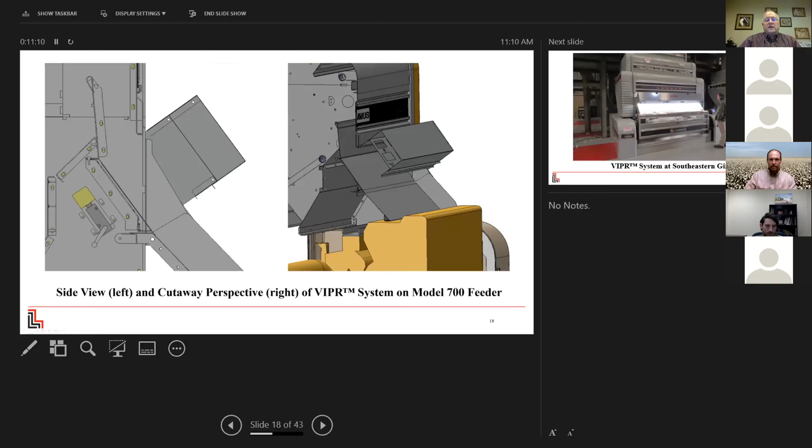Here with the doors open, you can see the 8 camera assemblies with the air purge nozzles to keep the lenses cool and clean. That is one of the most critical aspects. The unfortunate thing about a cotton gin is it's a very dirty, dusty environment, so that has to be a major consideration with these optical detection systems. You have to have a very clean, dry source of compressed air to keep those cameras cool and clean.

And so that is one of the major things we have to take into account when we're designing this system.

Now, when it comes to purging the cotton out of the lower feeder apron, that is not as important to have clean air. So what we're looking at doing is having a dedicated smaller source for the cooling and blowdown of the cameras themselves, and using the gin's compressed air supply, or augmenting that compressed air supply that's typically used in a cotton gin for blowing down things, to purge the contaminated cotton off the bottom of the feeder apron.

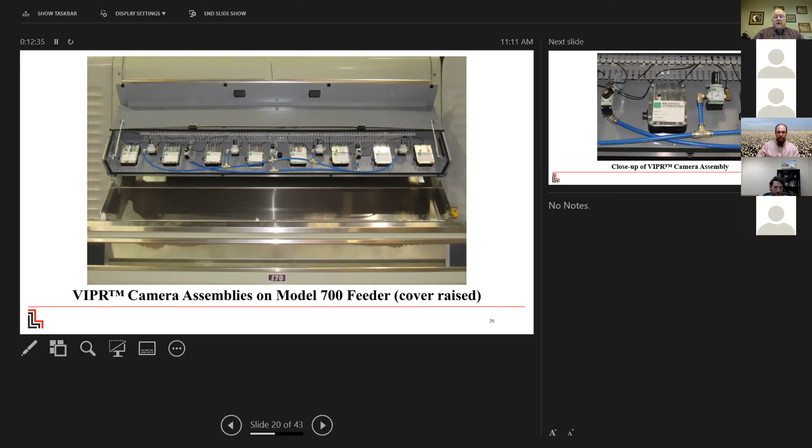Here's a close-up of the lens from Bratney. These are packaged in very tight sealed boxes, but you still have to purge them for the dust.

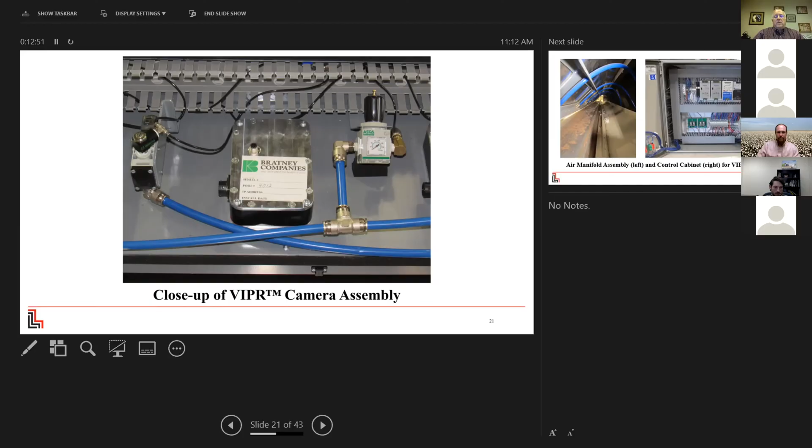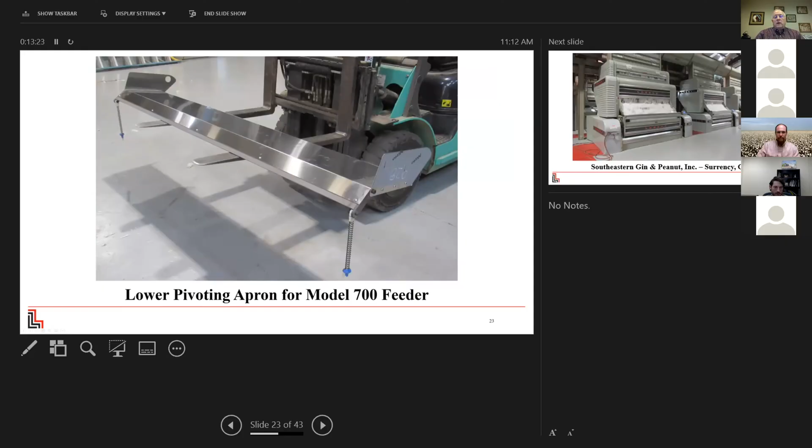Here you see the lower pivoting feeder apron. This is the upper part of that. The nozzles are on the opposite side here of this lower feeder apron, and that is what blows the cotton out. This lower feeder apron is what mounts right here on the feeder.

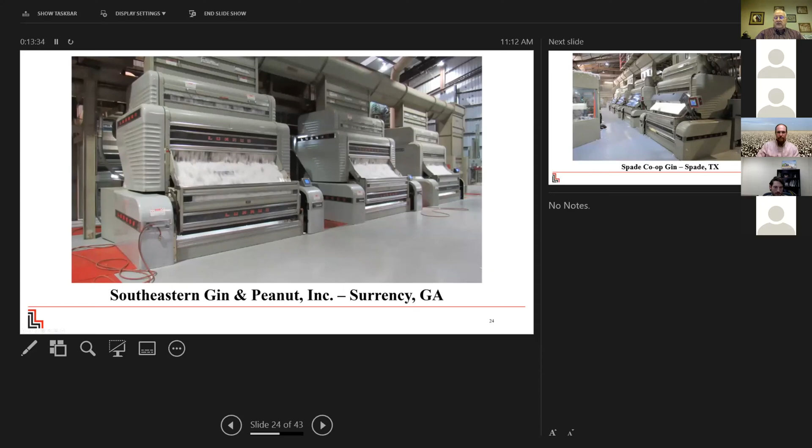And this shows the 3 gins and feeders at Southeastern Gin without the Viper system mounted on it. And then, of course, here at Spade Co-op, the one we tested last fall, this shows the lower feeder apron and the Viper system mounted on it with the controls back behind the gin.

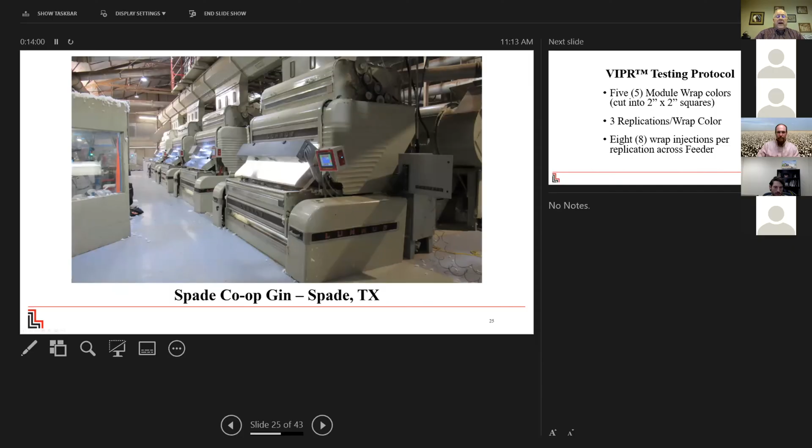John, when you mentioned the monitor systems, here are some of those monitor systems that were just detecting and not removing the cotton, mounted at Spade Co-op, and they were at other locations as well.

Well, the testing protocol, we're not going to belabor the testing. I'm going to go through this pretty quick. You can look at the recording of this, or if you really want, you can ask me for a copy and I'll send it to you in PDF format. We tested 5 different module wrap colors cut into 2x2 squares, did 3 replications per wrap color, and did 8 injections across the width of the feeder from left to right. In other words, we basically tried to use each camera in the feeder for each feeder that we did.

One of the things when you think about it, we talked about yellow having some of the aspects of colors in the cotton spectrum. Obviously green is another one, easily seen, easily detected, but that's the color of green leaf. When you've got a high amount of green leaf, obviously it's not going to know if it's plastic or organic leaf. It's going to see green, it's going to kick it out. So that's one reason. Brown is another naturally occurring color. Those are the reasons those colors are not as desirable.

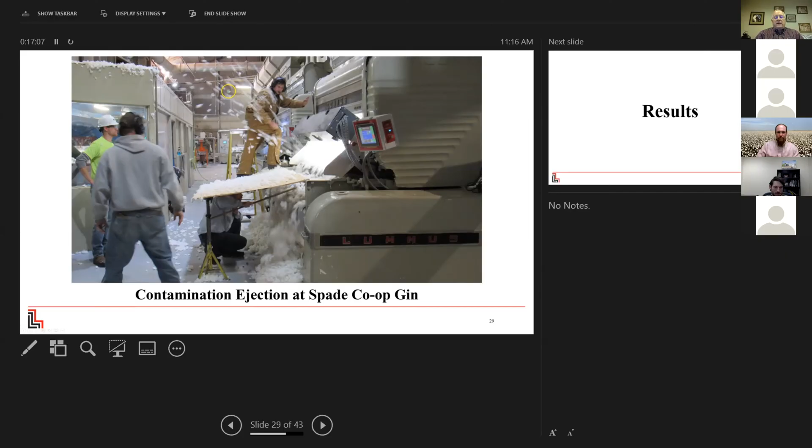We counted and collected what ended up on the floor, how many we collected in each of the systems. For yellow, we captured 12 of 15, pink 13 of 15, the blue and the green non-tacky we hit all the pieces, all collected, and 13 of 15 of the green tacky wrap. For all of those, we were hoping for a 75% or better collection efficiency.

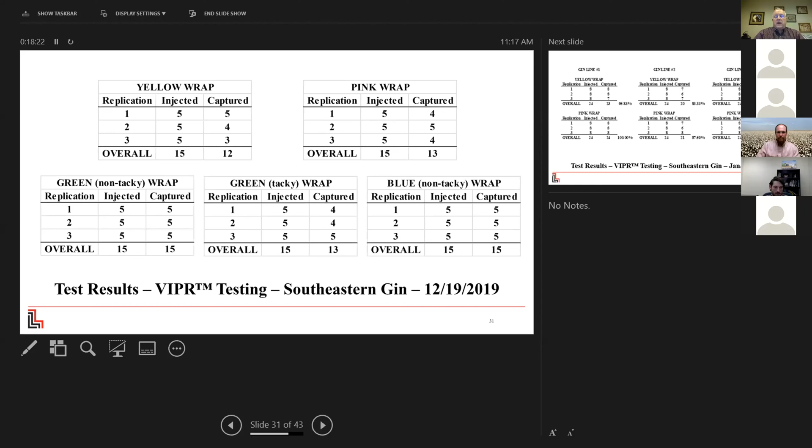Any system is not going to be 100% effective. This is not to say that you put in a VIPR system and you're not going to have a contamination problem, because there is contamination in other parts of the gin, and there are opportunities for things to get past even the VIPR. As our Cotton Council representative said this morning, it's only called contamination if it's in the sample on the top and bottom of the bale. Throughout that bale, you could have all kinds of other contamination. So we don't need to have a false sense that because we caught a bunch of it, we're not going to have a contamination problem. Until that bale is opened at the mill, there still could be contamination.

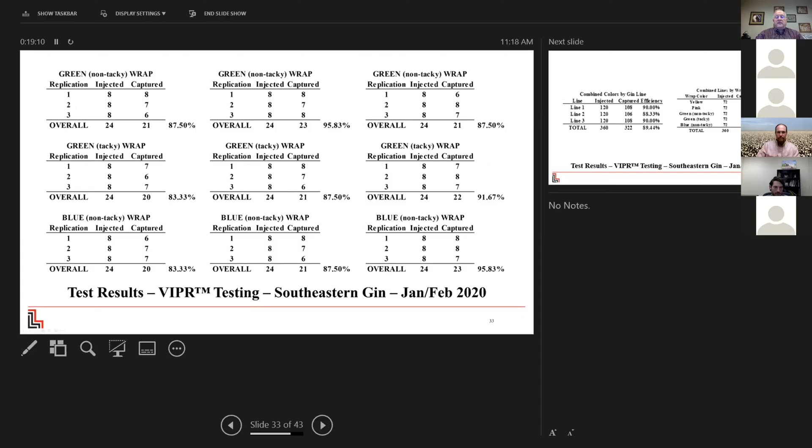Looking at the results from January and February at Southeastern, compared to previous results from the fall of 2019: we had an overall collection efficiency on the yellow wrap on Gin Line 1 and the pink wrap of 95 and 100%. On Gin Line 2, 83.3 and 87.5. On Gin Line 3, 91% and 83%. The other three colors show collection efficiencies all above 80% in every line, some nearly 100%, 95%. So we were very pleased that the system was working.

When we combine the lines, the overall collection efficiency was 89.4% either way, whether we looked at it by color or by ginning line. The overall collection efficiency of all was 322 captured out of 360 pieces injected.

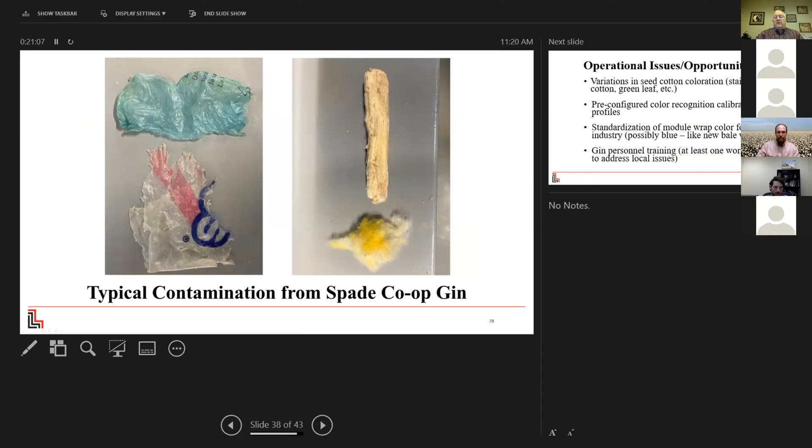So whatever we collect is good. If we can minimize it, here you see some stuff from Spade: the blue Walmart bag, the Huggies diaper wrapper, some pieces of stalk, a spray painted piece of yellow cotton. Don't know if it was sprayed on the side of the module or what.

Now, is any system perfect? Of course not. Designed by man, built by man. Man is imperfect, therefore nothing is perfect. But some of the operational issues we talked about, like stained cotton, we have to have different settings for the machine. If you've got a lot of stained cotton or green leaf, you're going to have to vary the settings based on the conditions of the cotton.

As a result, we're going to have to look at doing pre-configured color recognition profiles. In other words, for good quality white cotton, for cotton tending to be yellow stained, or cotton that tends to be gray, or cotton with a bunch of green leaf, you obviously want to adjust. If you're dealing with yellow and pink wrap or possibly blue wrap, there's not going to be a lot of green wrap on the market.

If you've got those colors, you can dial out that green from a detection standpoint. We talk about standardization of module wrap colors, blue being one of them, like the new Bale wrap, the 306C Pantone. I know Tama is going to want to utilize their trademark yellow color. It is detectable and recognizable, so I'm sure that will be one.

The performance standards of tensile strength and how they hold up under ultraviolet, et cetera, are going to be some of the most critical aspects of this system in operation.